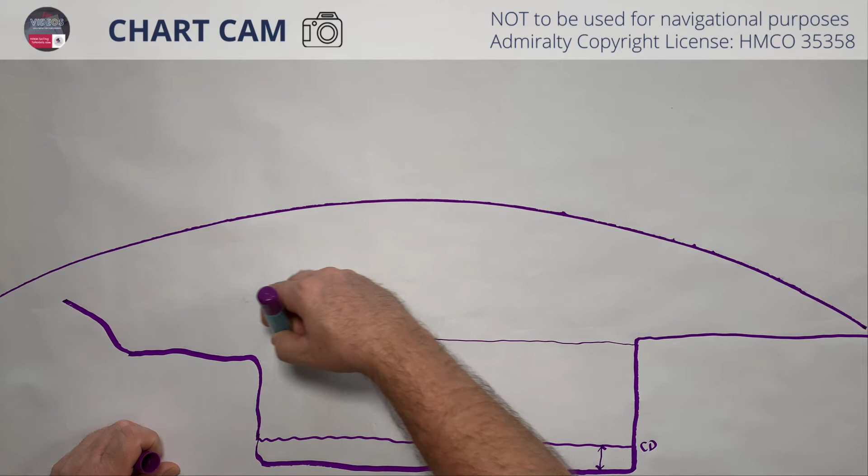Then we're going to have a highest astronomical tide, HAT, and that is basically the opposite of chart datum. So it's the equivalent of the highest tide that you should ever get. Okay, so highest astronomical tide, let's put that in like so. Okay, and that's HAT.

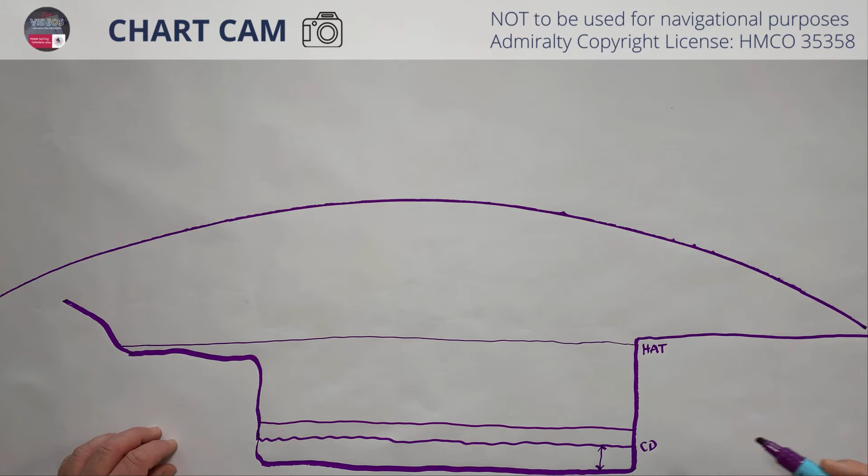Right, so between those two, obviously, we have got a notional tidal movement. So you're going to have a tide during any day. On a specific day, you're going to have a low water, and you're going to have a high water.

Okay, so that would be the highest high water before the highest astronomical tide, which will at some point be the same thing, obviously, on one day a year or two days a year, and these would be high water springs and low water springs. So if you're on the day of springs, then high water springs will be the high tide and low water springs will be the low tide.

And then you're going to have high water neaps and low water neaps. So we've got chart datum. This area is going to be the minimum depth you should expect. Minimum depth of water any time during the year.

So in this particular example, there's always going to be water in the river. Now, it may not be a lot of water, but there will be water in the river. So just for an example here, let's say that chart datum is uniform across the river, which of course it wouldn't be, usually. And we'll say chart datum is 0.3 meters. Okay.

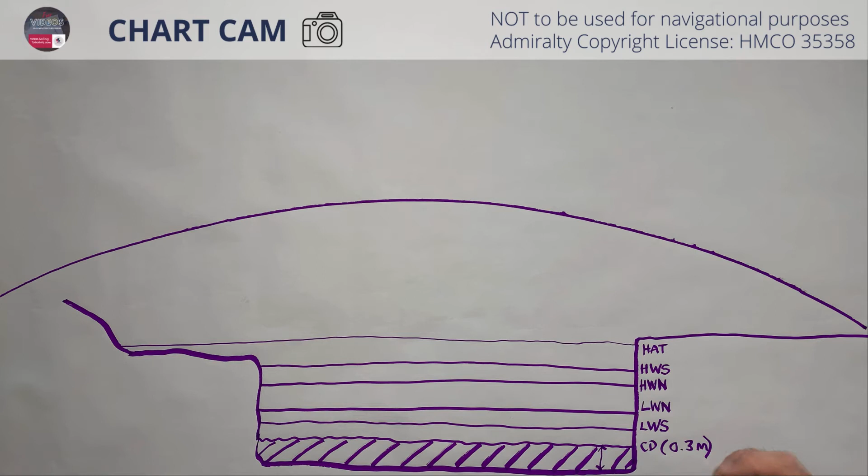So if we can work out the tidal height for different times of the day for a particular tidal period, then we can work out where the water height will be at that time. If we can work out the height of water, we can work out whether or not we have got enough depth for our sailing boat, and also whether or not our mast is going to clear the bridge. All right. So what we're going to do now is transpose onto this a yacht and put in some numbers here, and then we'll do the calculation.

Okay, so as you can see, my drawing is not exactly brilliant, but hopefully this will make sense to you. So these are varying water levels, and of course the water will go from lowest possible in the year, chart datum effectively, all the way up to the highest astronomical tide for the year. And depending on the day, you're going to have tidal ranges between the two.

This is our wonderful yacht, and the draft of the yacht is calculated from the waterline to the bottom of the keel. Okay, so most small yachts you'd expect to be between about 1.6 and say 2.5 meters. So that is the figure that's in the boat information that you've got, and that will give you your draft.

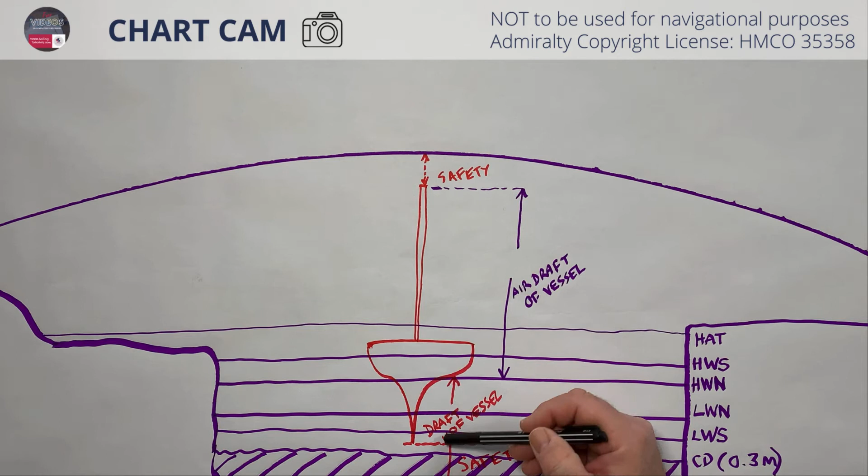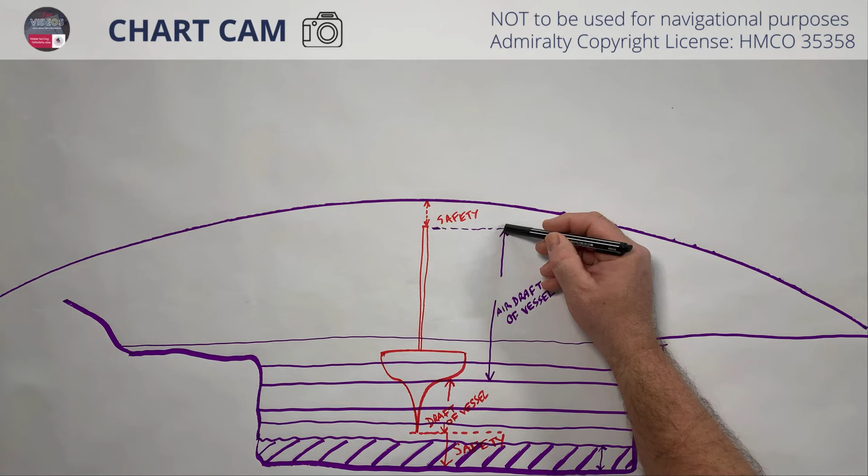So it's important that we get the right amount of water and pass under the bridge at the right time. So as always, we're going to want to have a safety margin underneath us. So we've got chart datum plus a little bit of water, and that's giving us a safety margin underneath the bottom of the keel. We're going to have a draft of the vessel, and then we're going to have this from top of the mast down to waterline, which is the air draft of the vessel,

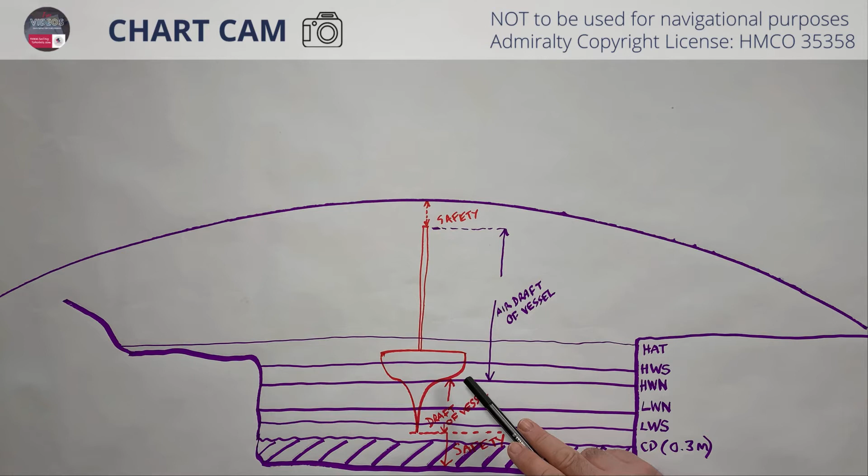which again would be in your paperwork. Now, of course, the air draft, in extreme circumstances, is going to change dependent on how much weight you have in the vessel. Of course, the more weight you've got in there, it's going to drop down into the sea. So if this vessel had not been fitted out and was being moved from the factory, you would need to remember that the draft is going to be different, although in that circumstance it's likely that the mast would not be a problem because it wouldn't yet be stepped.

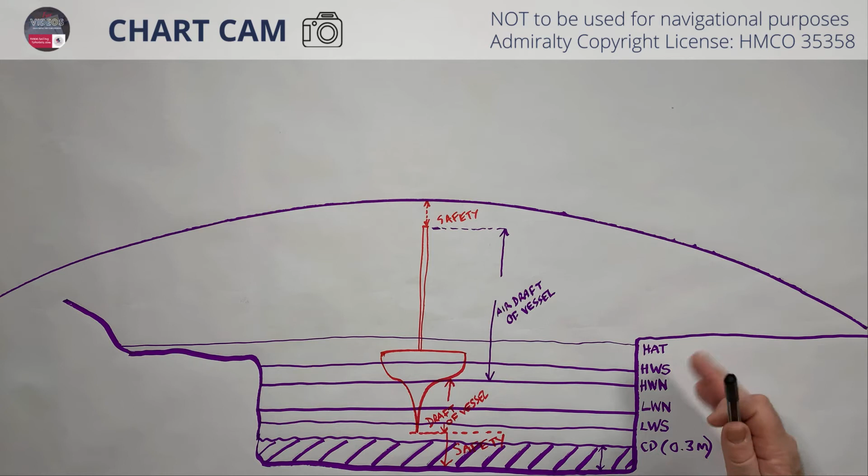Okay, so we need to work out at what state of tide we have enough safety margin under us to sail under here and enough safety margin over us to clear the bridge. And at that time, for that window, we can calculate that it would be safe for us to cross under the bridge. So let's do that now. So the first thing we need to work out is what the tidal range is going to be for the day that we're talking about.

So we go to our almanac, we fill in our tidal curve, and we work out for this location what the tidal range will be for that tidal period.

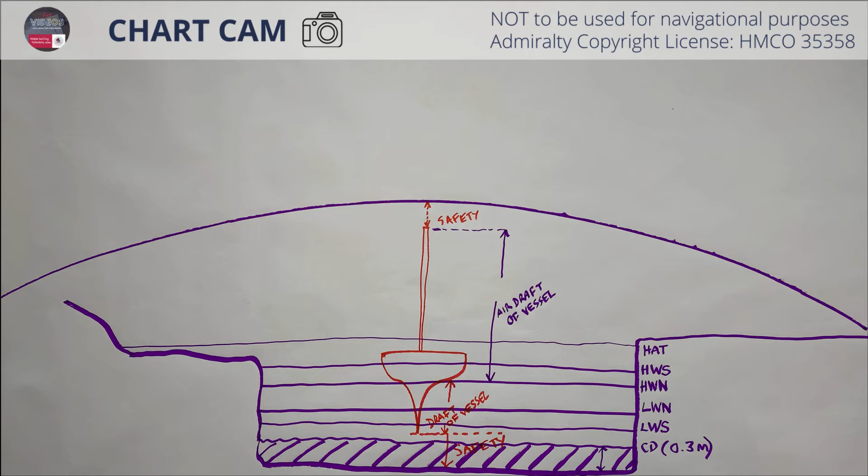But for this example, we're going to assume that we know what the tidal heights will be at specific times, and also that we've calculated the range already on the curve. So the curve gives us the speed at which the tide comes in and goes out, and therefore the speed at which the height of tide comes up and goes down. Okay, so we're going to make assumptions for this calculation rather than get into that detail.

So we've got tidal information, which we've taken from our tidal curve for the period of the day that we're talking about, and that's high water at 4.2 meters and low water at 1.6 meters. And then we've got our chart and vessel information. So the air draft of the vessel, which we would get from the information on our vessel, is 16 meters, and the air draft of the bridge, which would be on our chart, is 15 meters. The draft of our vessel, the water draft of our vessel, is 1.8 meters.

So to keep things simple here, I've said the air draft of the bridge is 15 metres. That would normally be known, it's a charted clearance for the bridge, and that will be shown in the chart. I'll show you an example of what that looks like here. Okay, so that's so that you can see what that refers to in terms of the height of the bridge. And that is taken from highest astronomical tide to the highest point on the bridge.

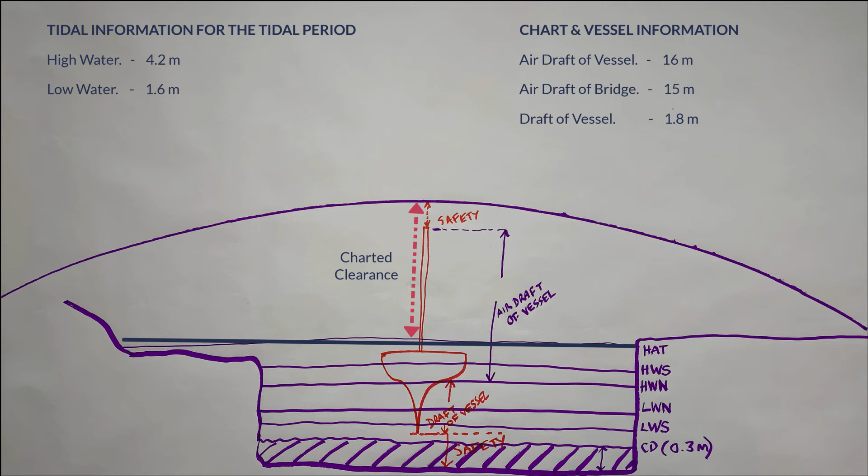So let's assume that we need to work out a time during the day or the night where we can clear safely under the bridge, not go aground, so have a safety margin of water underneath us, and also not hit the bridge, so have a safety margin above the top of our mast. So with the information that we've got, we can then work out how much water we need to have as a maximum and a minimum in order to meet those parameters.

Okay, so in this scenario we're going to assume that it's going to be quite tight, isn't it, because it's a low bridge. So we want 2 meters of safety above us and 60 centimeters of safety below us, so that we've got a meter either way to allow for things like barometric pressure changes, which might change the height of water, or a miscalculation even, or the fact that maybe there's an onshore or offshore wind delaying or speeding up the ingress or egress of water in the river.

Okay, so let's have a look at this. We've got a required safety at the masthead of 1 meter, and we already know that the clearance of the bridge is 1 meter less than the air draft of the vessel.

So if we have 1 meter less than highest astronomical tide, that will bring the masthead to the bridge height. Well, we don't want that. We want it lower than that. We want it lower by 1 meter. So we're going to reduce that.

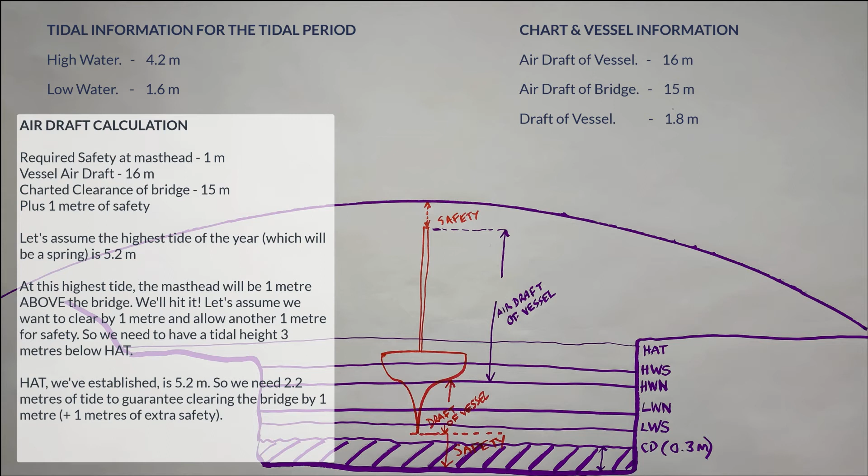Okay, so we know the depth of water we need to make sure that we clear the bridge. But at that depth of water, are we able to sail under the bridge without going aground? So we need to do a calculation based on our draft and look at the depth. So let's assume we want 60 centimeters of safety underneath our keel. That's fairly tight, but enough.

Well, the draft of the vessel is 1.8 meters, and the safety we want is 60 centimeters, 0.6 of a meter. So that means we need a total amount of water there of 2.4 meters in order to float 60 centimeters above the seabed. There's a chart datum, that's existing water there already at any state of tide, of 0.3 meters. So we can take that off the 2.4 because we're looking at how much tide we need to have in. So 2.4 less 0.3 is 2.1.

So we need to be going under the bridge when we've got 2.1 meters of tide in order to make sure we've got 60 centimeters underneath us in terms of the water at that time. And, well, quite conveniently, we know that 2.2 meters of water is required. No more than 2.2 meters of water is required in order to clear safely under the bridge with 2 meters above the masthead.

So if we are leaving or entering a port under this bridge, we want to be there on a falling tide at 2.2 meters of tide, and on a rising tide at 2.1 meters in a perfect world, and that gives us even more safety margin.

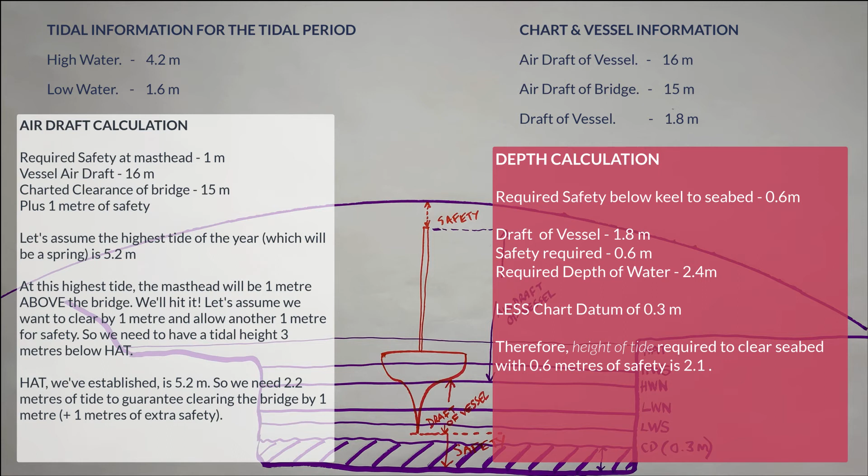However, it is worth just looking at these figures again. We know that we've got a 1.8 meter draft. We know there's 30 centimeters, 0.3 meters of chart datum, and we know the lowest tide in this tidal phase is 1.6 meters. So 1.6 meters plus chart datum of 0.3 meters gives us 1.9 meters, and we draw 1.8 meters. So worst case scenario, in this tidal period, we shouldn't go aground. We should have 10 centimeters under us.

So the good news is that if we arrive there at low water, we should go through and have maximum air draft clearance. But we don't want to go aground, so that's why we arrive a little after low water, so that we have a better clearance on draft, so that we can smoothly go under the bridge without going aground, but still have plenty of clearance above our masthead.

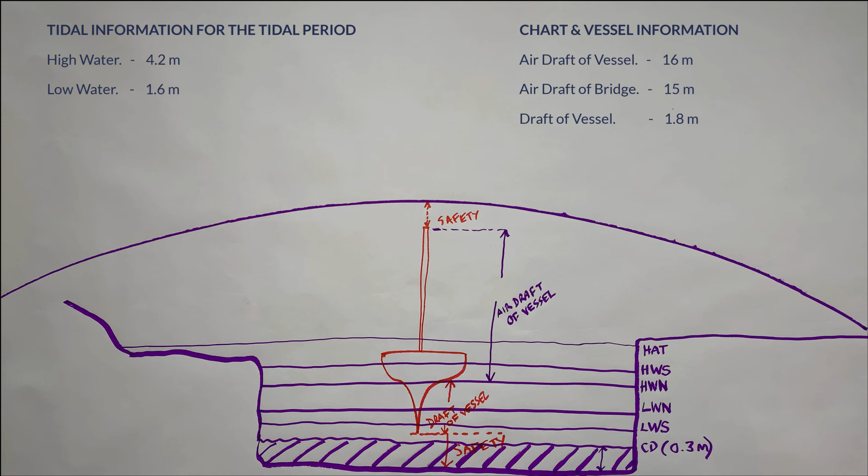Okay, so what we've done there is we've established that air draft is the distance between the top of your mast, or the highest point on your vessel, and the waterline. And the clearance, when you're going under a bridge, the charted clearance that the bridge has, is measured between the bottom of the bridge and the level at which highest astronomical tide would normally reach.

So the highest astronomical tide, in reality, the best way to look at that is to look at the highest spring of the year and to assume that that is the highest astronomical tide. So you can calculate your bridge clearance between the highest point on the bridge and the line of highest astronomical tide. You can then deduct the amount of tide that you need to lose from highest astronomical tide in order to pass under the bridge.

So as we've already said in the video you've just seen, if we've got a 16 meter air draft on our vessel and we've got a 15 meter clearance at highest astronomical tide, we are going to need to have 1 meter less than highest astronomical tide for us to just touch the bridge, 1 meter less than that to have a meter of clearance, and 1 meter less than that to have a meter of clearance plus a meter of safety. So that's 3 meters less than the tidal height at highest astronomical tide.